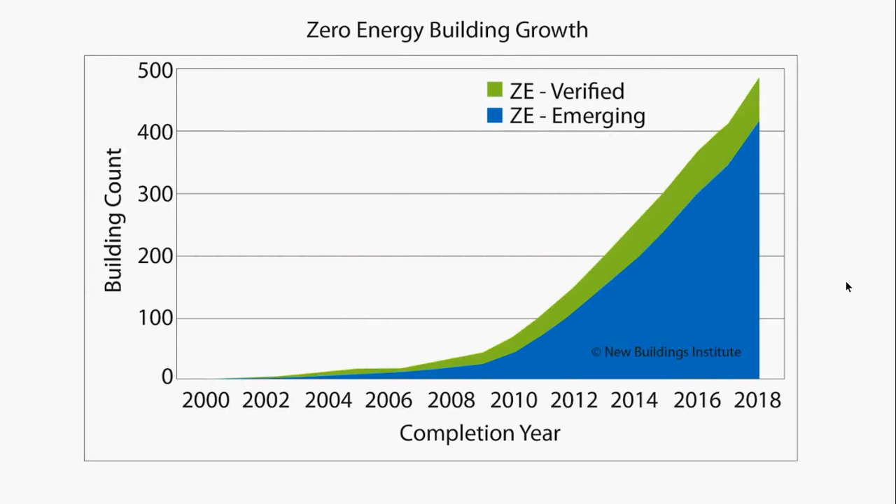I was asked today to talk about zero energy buildings. This is the New Buildings Institute, which has been studying and looking at zero energy buildings, and it's clear from this hockey stick chart that there are more and more zero energy buildings coming online every year.

In the industry you hear us talk about a lot of different terms: net zero energy, zero net energy, zero energy. These are all the same terms. You might hear us talk about zero carbon, and that's slightly different. We can also talk about net zero cost. There's a lot of different terms going around.

This is one that Jacob Knowles at BR+A put together, looking at the zero net energy classifications used by NREL, and there are different ways to talk about zero net energy. Class A means your building is going to create as much energy as it uses within the building footprint. Class B means it creates as much energy as it uses on site. Then Class C and Class D and onward, with Class D saying that you can actually purchase off-site renewable energy to offset the energy use on your site.

So there are different ways and different classifications, and it's important when you go through and talk about ZNE that you are clear that everyone is speaking the same language.

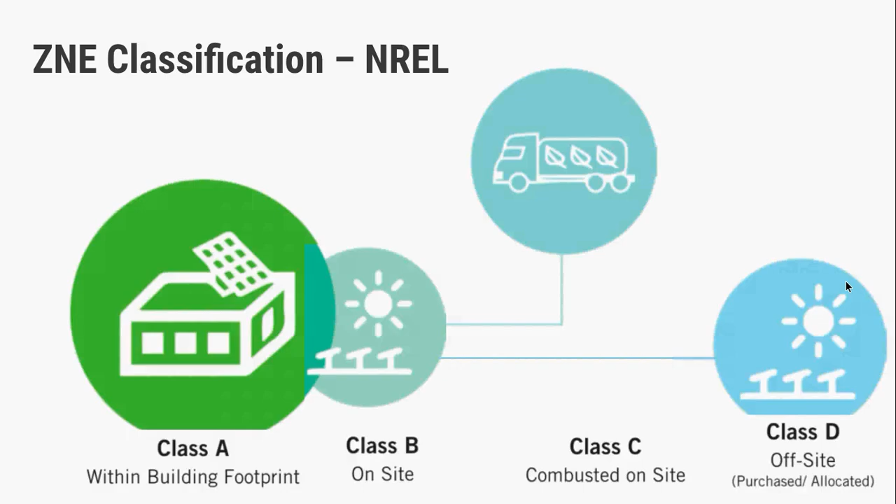There are some organizations out there. The International Living Future Institute, for instance, has different zero net energy certifications, starting with zero carbon certification, going up to zero energy certification, and then progressing all the way up to looking at the entire building across different aspects besides just energy and carbon for their Living Building Challenge certification.

There are others. LEED now has their zero certification, which looks at energy, transportation, waste, and I believe also water. So instead of just saying this is what we're doing, you can actually certify your projects now.

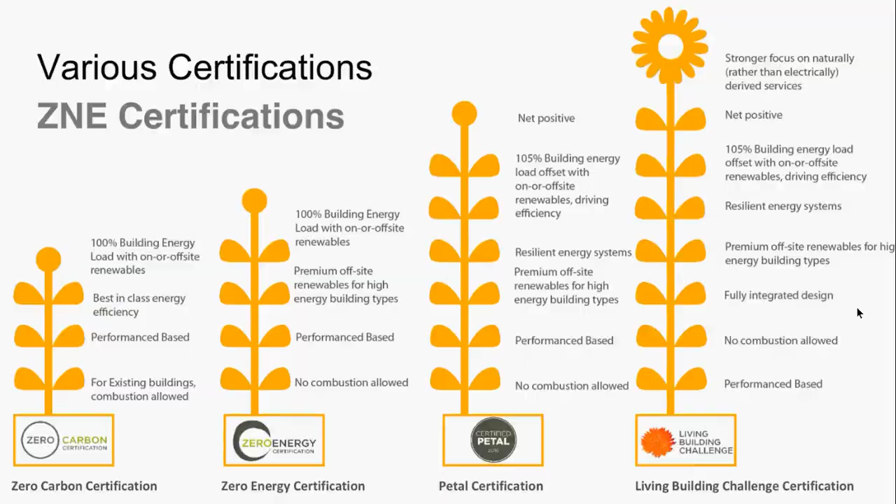About almost a year ago, USGBC, in collaboration with MCAN, MAPC, NEEP and a couple others, put together a municipal roundtable event focused on zero net energy.

We had a number of different communities represented. This is not an exhaustive list of all of the activities happening in Massachusetts, but there's a lot of different activities happening, and this is what was outlined and represented at our summit.

At that summit, the number one barrier to zero net energy that this group came up with was upfront costs. They said the number one barrier to zero net energy buildings was upfront costs.

They said the most popular big ideas to overcome some of these barriers were code changes, and the next runner-up was financial incentives.

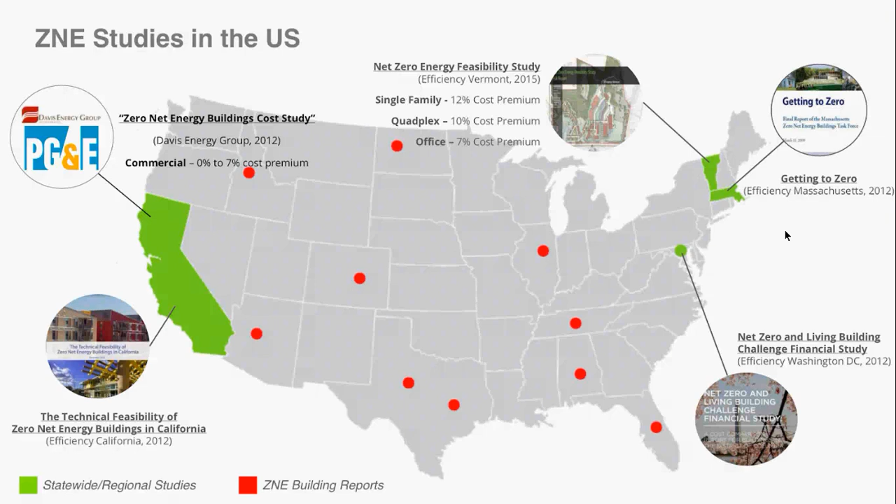Based on that, and in addition to that, there are a whole bunch of studies that have already been completed around the United States on the cost of zero net energy buildings.

We wanted to look at what you could do here in Massachusetts, and we actually have a report coming out looking at the cost of zero energy buildings in Massachusetts, called Saving Money from the Start. This hasn't been released yet, but this is a little bit of a preview. It should be coming out really in the next couple of weeks.

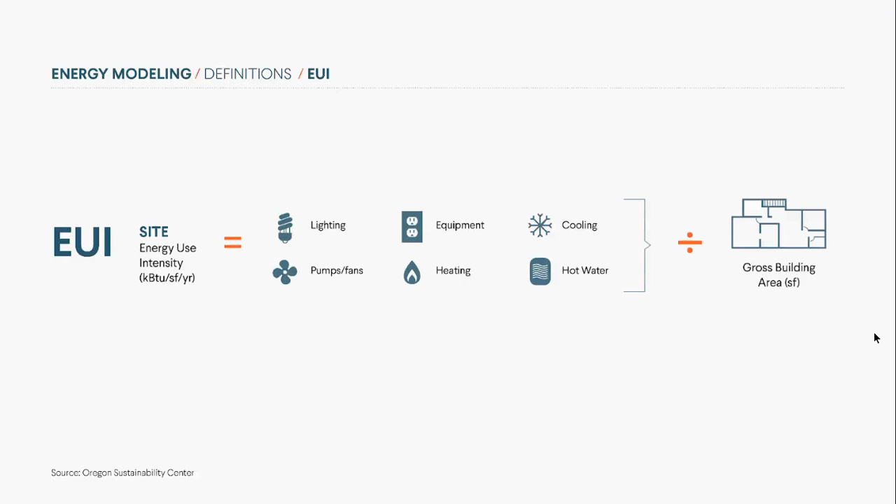Just a little definition: when we talk about zero energy buildings, we talk about the energy use intensity—how much energy that building is going to use per square foot, including all the things that go into using a building, like lighting, pumps, equipment, et cetera—divided by the gross building area. Every building we have has an energy use intensity, and this is a way that we can start comparing buildings from one to another.

When we're talking about zero energy, the way we get there is we take a typical building—let's say it has an energy use intensity of 27—and we try to drive the energy loads down as far as possible through energy conservation measures, like a better envelope, more efficient air conditioning and heating systems, better lighting, et cetera. Through doing that, we can drive the energy loads for that building down pretty significantly.

So if we start with an energy use intensity of 27, we can relatively easily get to what we're calling a zero energy ready building, with an energy use intensity of 13, using standard energy conservation measures available today. We're cutting our energy use from 27 to 13. Then, to make it a zero energy building, we either need to put renewable energy on site, or use a combination of on-site and off-site renewable energy.

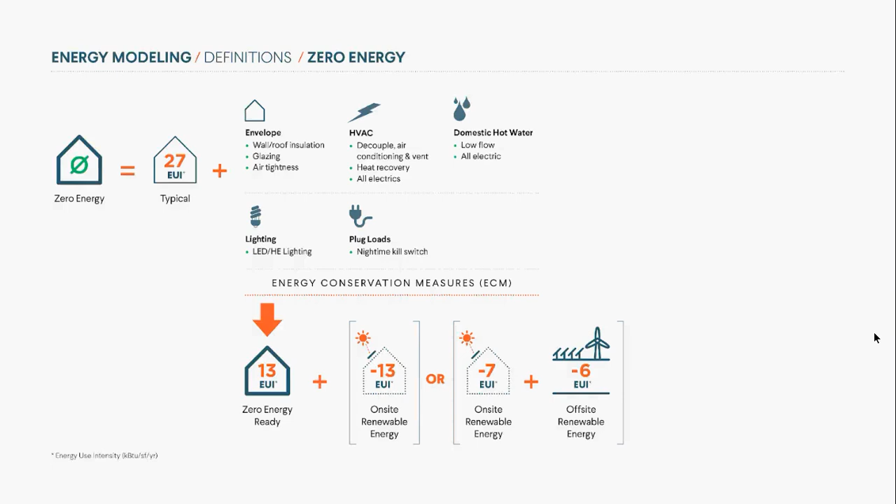For our study, we looked at 6 different building types. We ran energy models for those building types to identify how low we could drive the energy use with energy conservation measures. That then told us how much renewables we would need, either on-site or a combination of on-site and off-site.

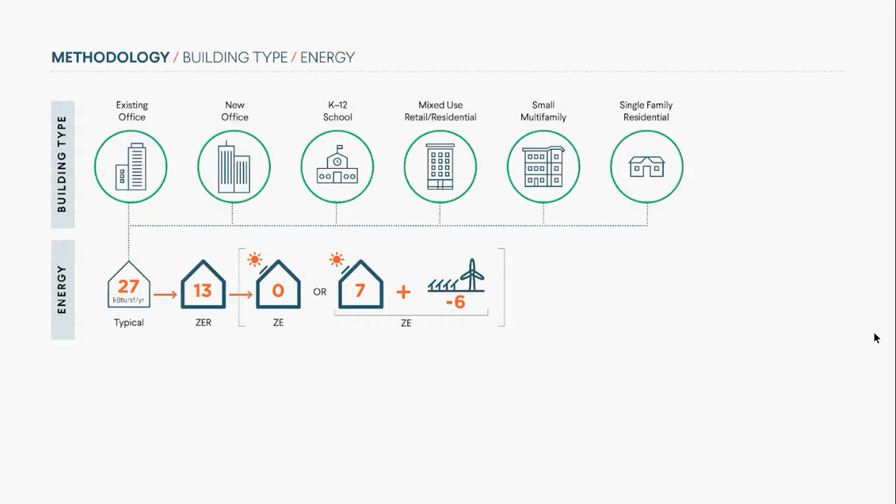We ran life cycle cost assessments looking at the cost of a typical building, the additional money it would take to get to a zero energy building, and how much it would take to have renewables. We subtracted all the available incentives and the savings you'd have, and for each of these buildings we got a break-even year.

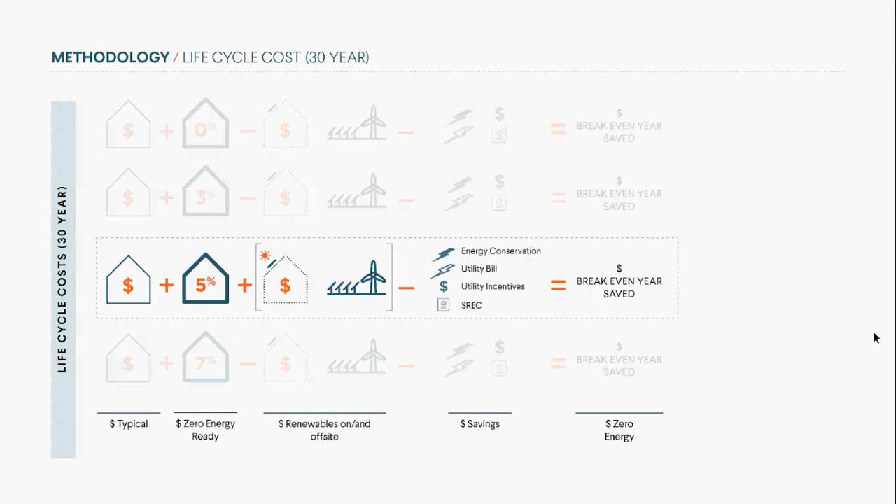This is an example of one of the buildings we looked at, where we were able to drive the energy load down significantly, over 50%. This would involve going to a full electric building, and then you'd make up the remaining load with some on-site PV, with the rest needing to be purchased.

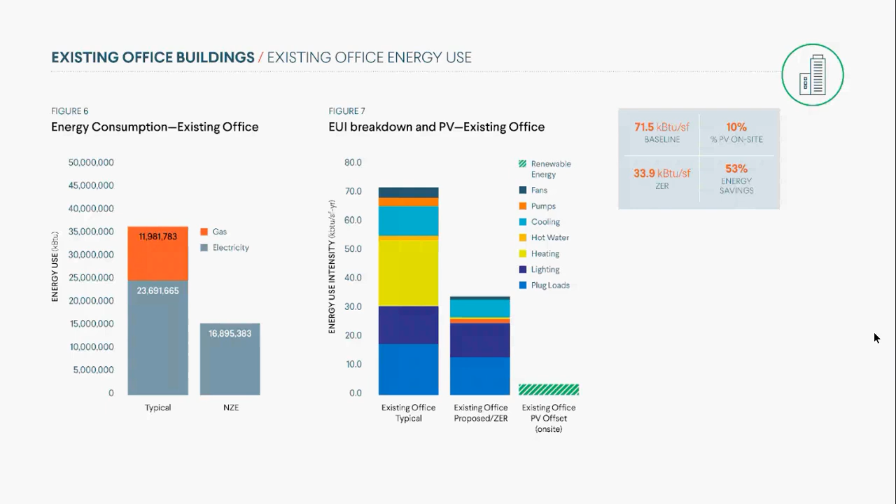This particular building type had a 6-year break-even point.

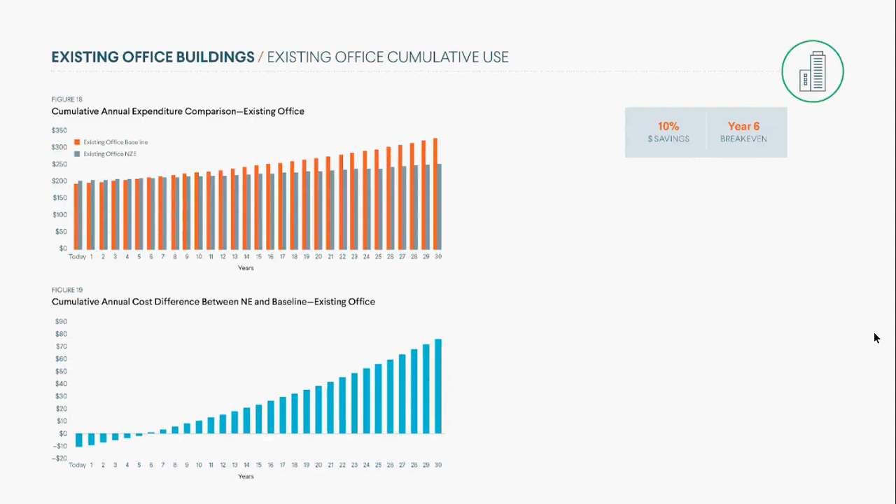And the point to all of this is that we actually have a lot of examples of these projects in Massachusetts right now that are operating, including the King Open.

These examples range from schools to science centers to multi-family residential—lots of different building types, and lots of examples of buildings doing zero energy with little upfront cost and long-term savings.

This is just one of those examples: Bristol Community College, the SBREGA building, designed by Sasaki with engineers BR+A.

This is a drawing they did going from high performance, and they actually did a redesign of this building to get it to zero net energy, simplifying the systems for this building.

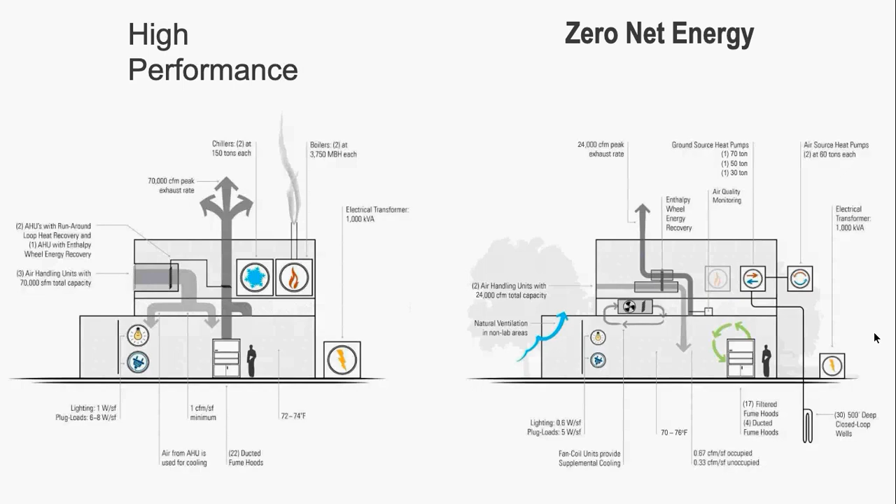In doing so, they were able to save money that balanced out their costs.

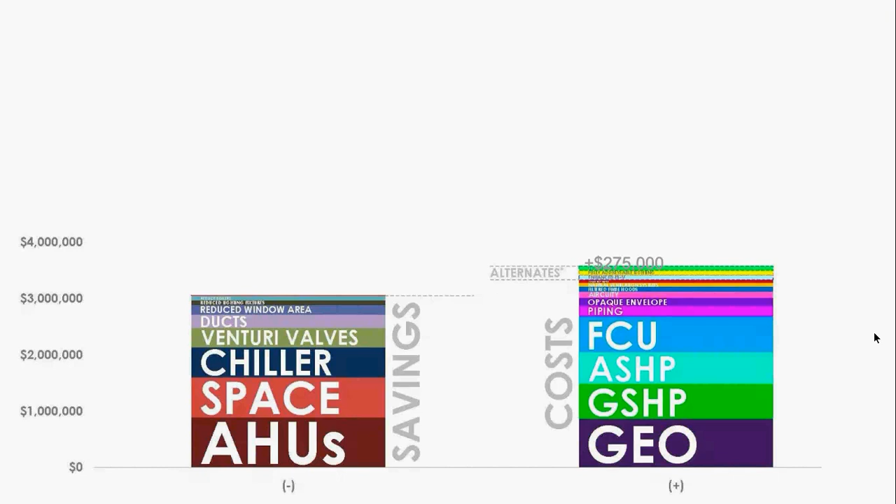In the end, this project ended up not costing more, and with the financing they had and all the available incentives, they ended up saving money on this project.

This is relatively recent data, and the project is actually outperforming the projected targets. So you have an example of a building that didn't cost more money for the project team.

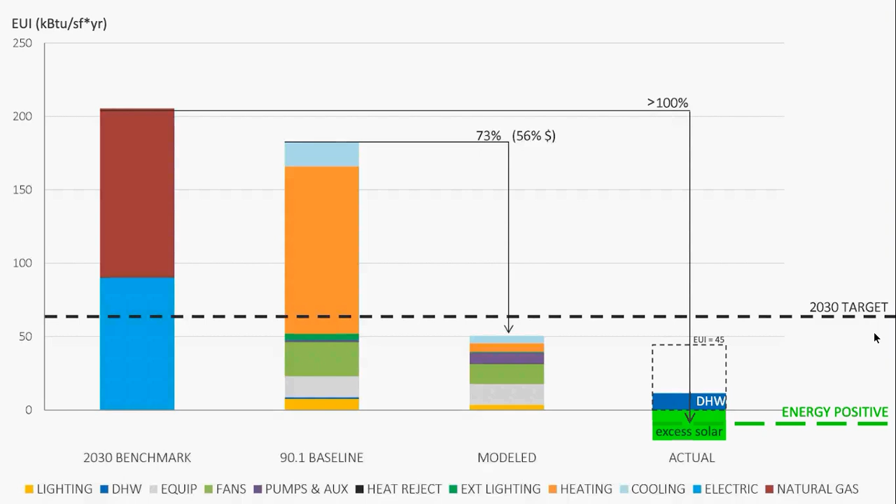They were able to redesign with different systems to get from a high-performing building to a zero-energy building, and they have solar on site—it's a zero net energy building.

We have more examples of these projects and different building types that we looked at, and more examples of projects in Massachusetts being built today with very low, if any, added upfront costs to get to zero energy buildings.

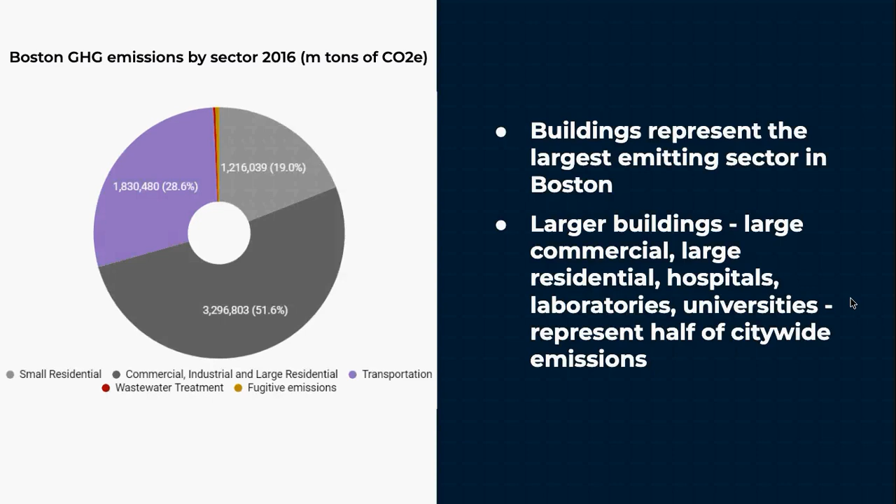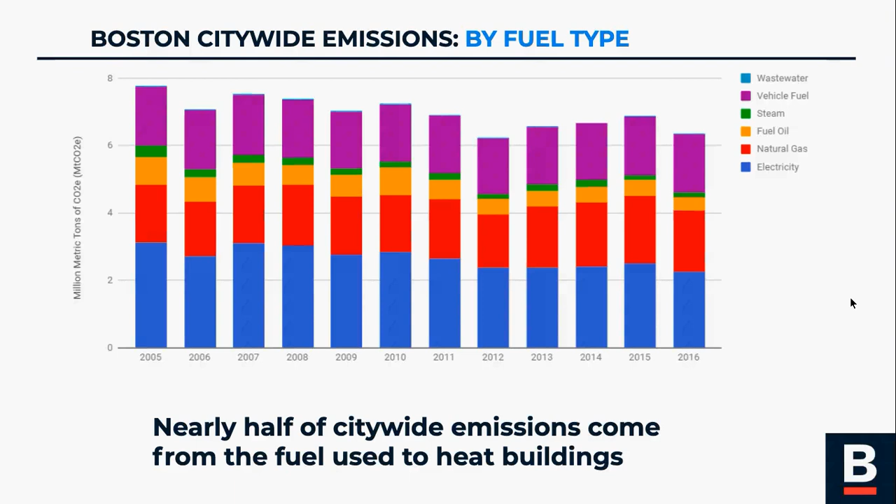So the question is, what do we do with that information? How do we move on and start acting in that particular area? The Carbon-Free Boston report, recently released, was prepared by the Boston University Institute for Sustainable Energy. Its goal was to look at what strategies were needed at a high level for Boston to meet its 2050 carbon neutrality goals. At that high level, the BU team saw three main interconnected themes for strategies that should be pursued simultaneously across all sectors.

First is efficiency. In all sectors, we must lower energy demand as much as possible. For buildings, this means better insulation, more efficient equipment, and more efficient overall operations.

Secondly is electrification. All energy usage has to come from electricity consumption, and direct fossil fuel consumption needs to be phased out - natural gas, oil, all that stuff. For buildings, this means moving towards heating equipment such as air source heat pumps and ground source heat pumps that rely on electricity. Lastly, renewables - all that electricity has to be coming from renewable sources, whether on or off-site for the building.

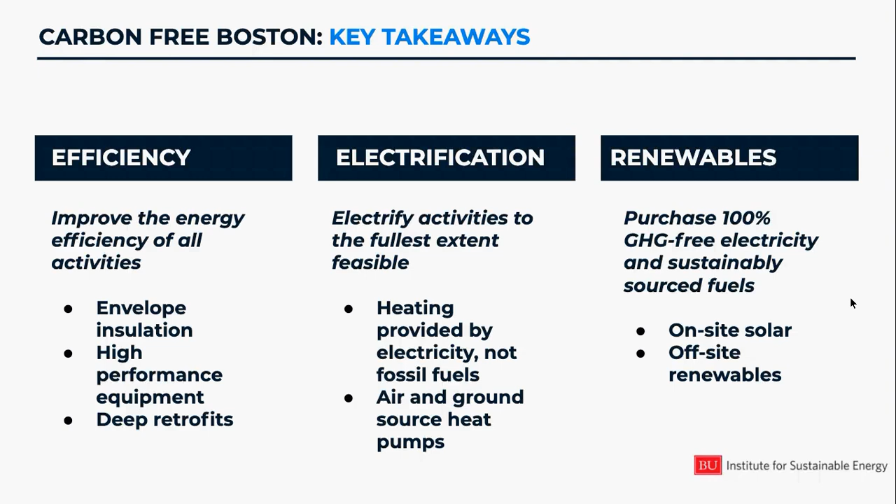These are the overarching strategies that Meredith went into far greater detail on, of how you get to meeting these goals for buildings and essentially getting to net zero building.

According to BU, a key area for this is to ensure that all new building construction is being done at a net zero carbon standard that meets those three overarching themes. As folks know, we're in the middle of a pretty big building boom here in Boston, and each new building built is a new emission source. So the sooner we act to ensure these buildings are built to a net zero standard, the better it is for both Boston and the overall environment.

The graph here shows two different scenarios depending on when a new net zero building standard comes into effect, between 2023 and 2030, and shows the cumulative emissions on an annual basis that would come from those two scenarios.

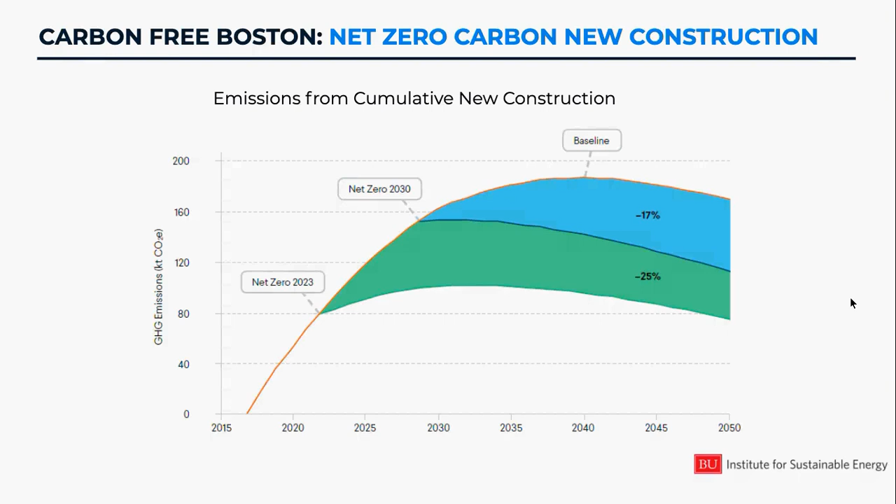The City of Boston, as well as all municipalities in Massachusetts, does not have authority to change or adopt its own building code. That is determined by the state, by a body called the Board of Building Regulations and Standards, or BBRS. We're going to go into a little bit more detail in the next section.

Recognizing this, and the need to move quickly towards a net zero building standard, the mayor of Boston, the city manager of Cambridge, and the mayor of Somerville came together and signed a joint letter to the BBRS urging them to adopt a net zero standard. This has begun to move forward, as the BBRS has since moved to look into what adopting a net zero standard will look like, and we're very excited to see how this collaboration will move forward.

But new construction isn't everything. BU analyzed Boston's current building stock of predominantly older buildings combined with current projections of construction growth over the next 30 years, and found that in 2050, assuming business as usual with no big environmental reduction changes, as much as 93% of our buildings' emissions will still come from buildings that exist today.

Boston has a very large, very old, in many cases not well insulated building stock of more than 80,000 freestanding structures. The vast majority will likely need to make some form of efficiency retrofitting in the coming years if we are to meet that 2050 goal.

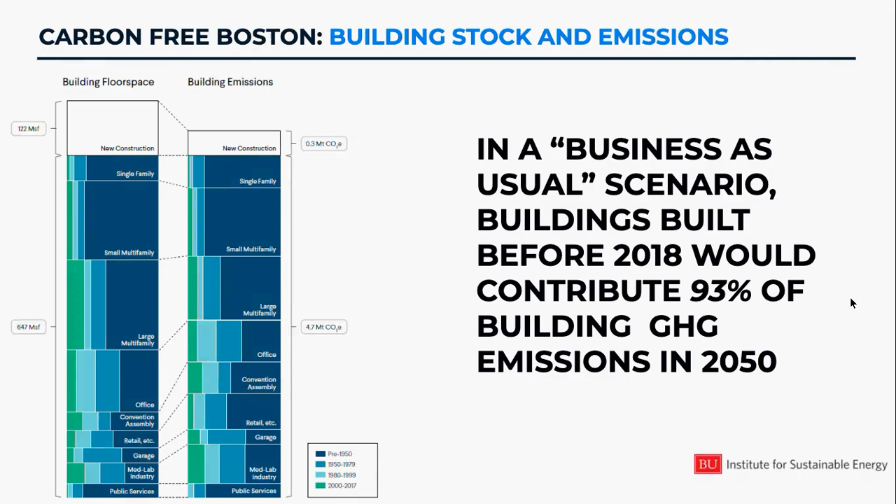It is all to say that requiring net zero new construction is incredibly important for Boston's strategy of meeting our 2050 carbon neutral goal. But retrofitting the currently existing building stock is really where a lot of the most important work is going to be taking place over the coming years.

The BU study found that through a combination of deep energy efficiency retrofits, electrification of building heating systems, and a transition to a 100% renewable electricity grid, we can achieve a net zero carbon standard for the bulk of Boston's existing buildings. Though, at the far end, there are residual emissions—areas for more innovation as we tackle some of the harder-to-reach emissions reduction sources, especially around hospitals, manufacturing, and laboratories, which have a lot of high intensity energy demand needs.

That's one of the many pieces of the puzzle that we're going to have to be looking at over the next 30 years.

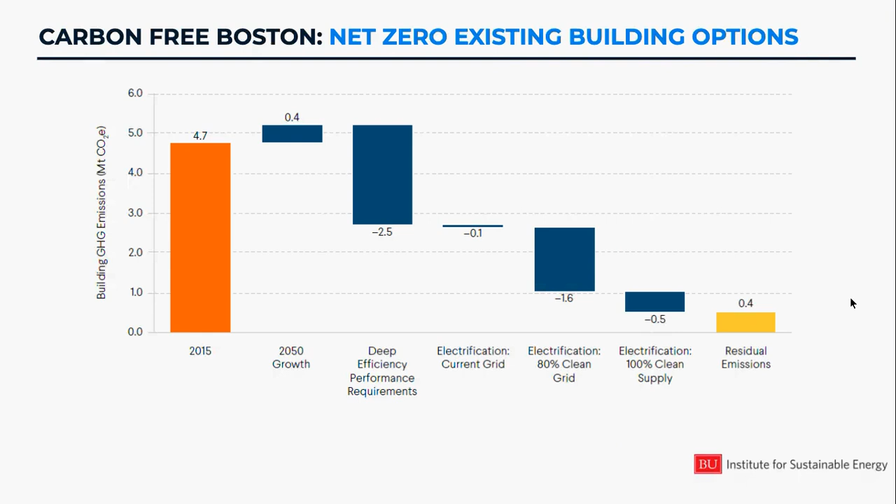Right now at the City of Boston, we're working to update our climate action plan using the BU Carbon Free Boston findings to inform our analysis, and working with a lot of stakeholders and people in the community to develop ideas of how to put these into action. I believe many folks possibly on this call and with MCAN have been involved in that. We're still a little ways away from all that being finalized, with a lot more meetings and analysis to go through, but there's been a lot of productive talk on strategies for net zero retrofits for existing buildings.

I just wanted to end with two case examples of programs and policies that we're seeing outside of Boston that have come up in discussions around the Climate Action Plan, and give an idea of what some of the possibilities will look like. We're not necessarily saying we're going to adopt similar things—some of these things we might not be able to—but it gives an idea of what's theoretically possible.

The first is Energiesprong, which literally means energy leap, from the Netherlands. This is a program that relies on innovations in the prefabricated building component space to manufacture, on a mass scale, exterior insulation cladding for existing small-rise residential buildings. In so many words, it means you're putting a giant warm coat over little homes to make them far more efficient, with better insulation and better envelope. The picture in the middle shows this: the one on the right is an Energiesprong retrofit, the one on the left is not.

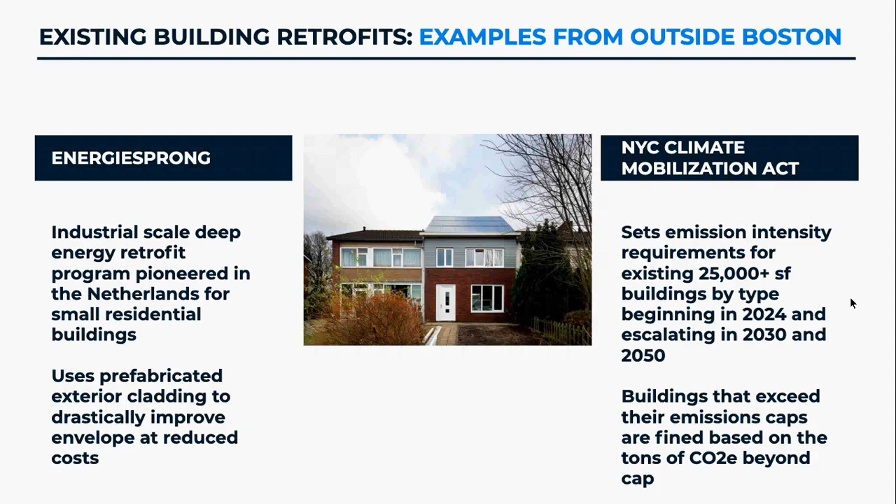So, the question we want to shoot back to you all is, what do you think else we can be looking at? What else can be done on existing buildings? And also, it's not all on the city. How can community groups, the private sector, and other stakeholders help make your home, schools, and workplace net zero? Thank you.

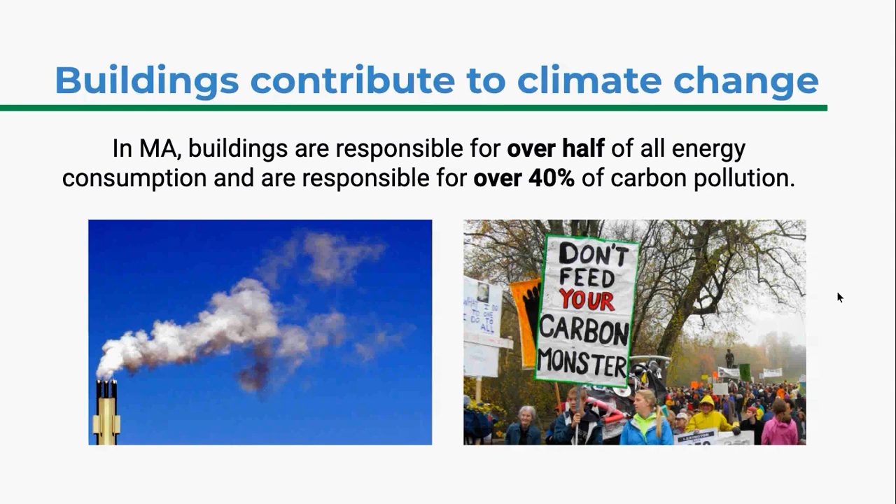So here we have the question, why do we need a net zero stretch code? The answer is pretty simple. As we have just seen in Ben's presentation in a lot of detail, buildings contribute to climate change in a major way. So in order to meet our community's climate goals as well as the climate goals of our Commonwealth, we need to start making sure that all new buildings are being built to the most efficient standard possible. Net zero building codes have already been implemented in DC and in California, and there are lots of great examples out there of net zero and zero energy codes that could form the basis for a similar code in Massachusetts.

So very quickly, I'm just going to go over how building codes work in Massachusetts. I know Ben started this conversation, but I thought I would clarify for any folks who are unfamiliar with the process that unlike in most states, in Massachusetts we only have 2 building codes, the base code and the stretch code. The base code is our metaphorical floor for new construction, and the stretch code is our metaphorical ceiling. And both of these codes are implemented by the BBRS, the Board of Building Regulations and Standards, which is a body of about 10 people, ranging from code officials to building inspectors, that is appointed by the governor. And all towns and cities in the Commonwealth have to adhere to these codes.

So how do we change our building codes? Tonight we're going to be really focusing on our net zero stretch code work, but I also wanted to briefly touch on the work that MCAN, as well as many of our partners—and I'm sure a lot of the advocates on this webinar—have been doing over the past year to strengthen our base code. So we've been doing this by recruiting pro-efficiency municipal officials to register to vote on the new version of the International Energy Conservation Code this coming November, which will ultimately become the new base code in Massachusetts.

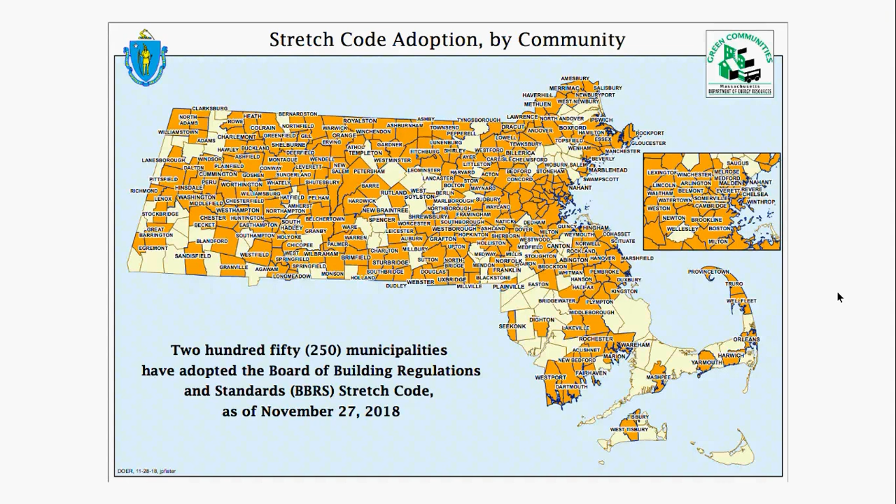This is a map showing which communities have adopted the current stretch code, which is, as you can see, much of the state. Something else important to note is that in order to become a green community, you must pass the stretch code.

So what have we been up to get this work done? We partnered with two new climate champions in the State House this session, Jo Comerford and Tami Gouveia, to file an act to establish a net zero stretch energy code. This is a pretty simple bill. It essentially directs the BBRS to develop a net zero carbon code to be fully implemented by 2030.

We want the communities that were the first to adopt the original stretch code and are ready to do net zero planning now to be the first to pass the new stretch code, meaning there will be a phase-in period for other green communities. We also want to make sure we're amplifying the voices of environmental justice communities, folks paying the biggest slice of their incomes and utility bills, to make sure our transition to net zero is an equitable one.

Now I want to highlight a recent victory that Ben touched on: by teaming up with partner organizations and advocates across the state, as well as legislators and our climate champion municipal officials, we were able to really pack the last BBRS public comment hearing with folks testifying in favor of a net zero code. Just last week, we got this exciting news that the BBRS decided at their June meeting to get to work on a net zero code. This is a big step in the right direction and absolutely could not have happened without the grassroots work of advocates like you all.